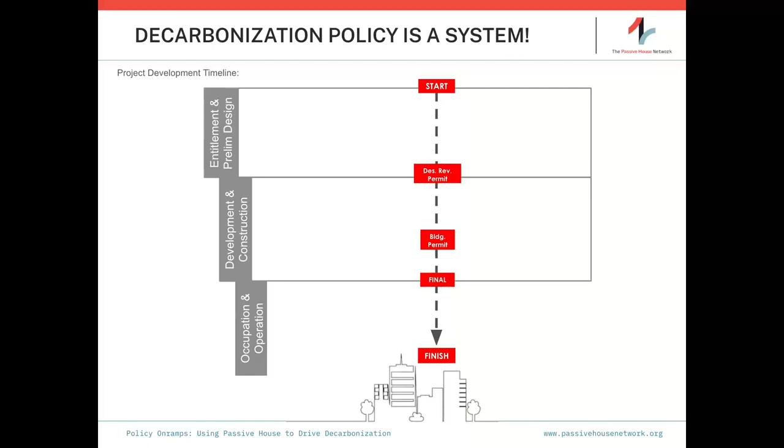If we look at the various overlays that affect those processes, zoning and design regulations are the first overlays we have to navigate, the hurdles. Then we've got the building codes and the energy codes that impact the development process.

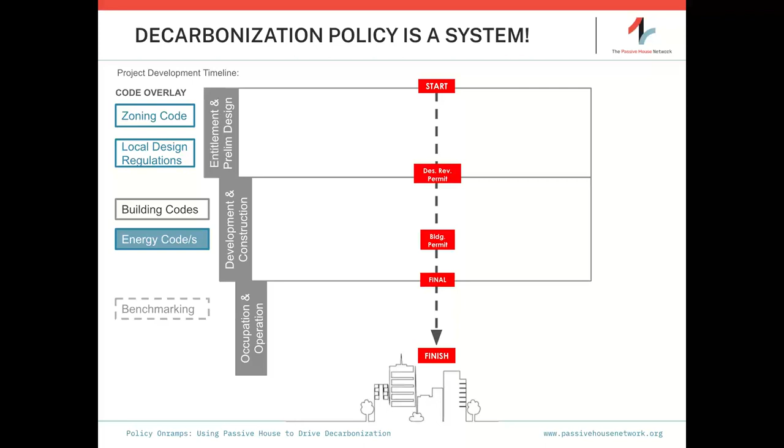I put benchmarking at the end here, because this is a policy and regulatory framework that's really just being implemented, and is being done so very successfully by various jurisdictions to drive decarbonization. It's a sort of retroactive policy that actually drives things at the front. Keep that in mind as we go through here, and don't forget that as an opportunity for a fabulous policy incentive program.

Our code compliant buildings all go through this, but primarily we look at policy, and we end up focusing, all of us efficiency folks including Passive House proponents like myself, primarily on this energy code as our key lever to push efficiency. What I'd like to share with you is that's actually only one lever, and I find it a very small and somewhat ineffective one.

I think we need to really expand our reach and look at other opportunities we've been missing, that are just sitting there like Cinderella waiting to be asked to the ball. Those are the two places where the conventional code framework looks at efficiency, and it's only in those two spots, you know, not all buildings actually do very rigorous site verification for whether the energy code requirements have actually been implemented on site.

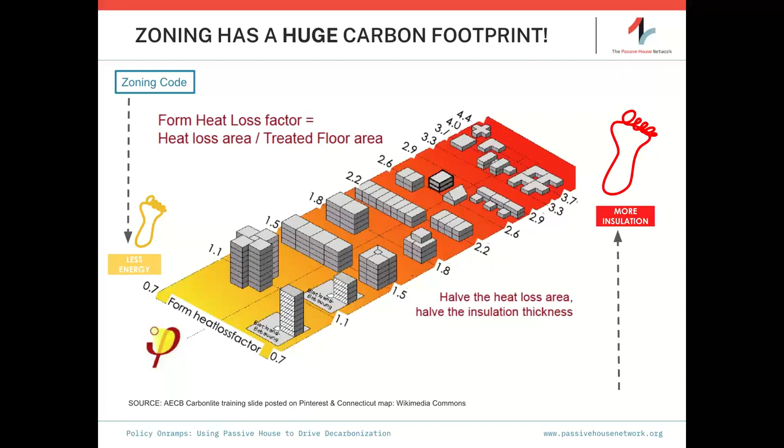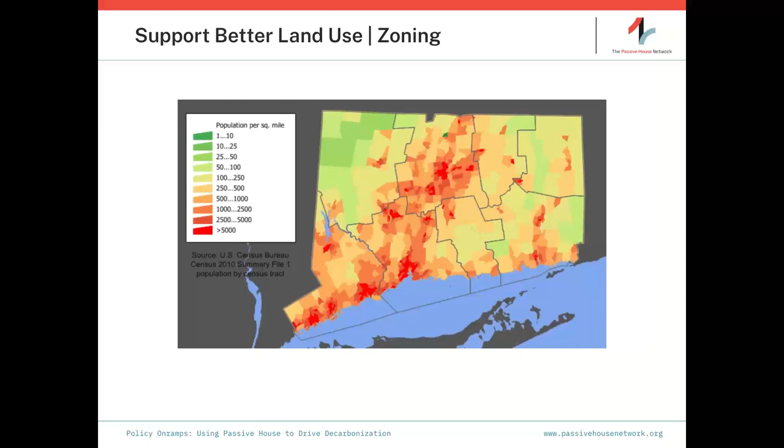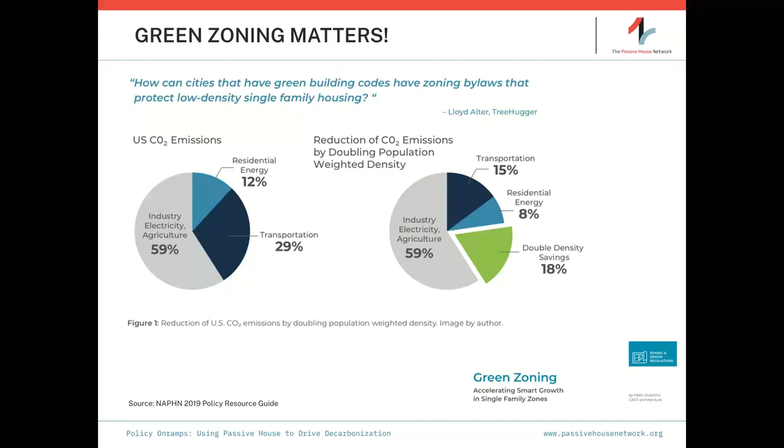As I mentioned, Matt Hutchins wrote a fabulous article for us in our policy resource guide that looked specifically at zoning and design regulatory overlays that disincentivize deep energy reductions, because 75% of most US cities are designated single-family zones, which is a very inefficient land use and planning structure. Matt talked about green zoning, accelerating smart growth even in single-family zones by allowing 4 to 6 unit buildings on those lots, showing the massive reduction in CO2 emissions that can result from simply removing the single-family zoning overlay.

And of course, the corollary to zoning are the design regulatory overlays. Many cities in California and elsewhere have design review guidelines for local neighborhoods that end up making architects, I'm sure all the architects on this webinar are familiar, break down the massing of their building. It's sort of another pet peeve of mine, where we come to these design review sessions, and the planners, in their well-intentioned way, think they're trying to make the building less visible, and what they force architects to do is add all these bump outs and break up massing, because it's perceived as a more benign, less impactful way to design. Effectively, what it's really doing is forcing architects to make their buildings way less efficient.

They're way harder to air seal, require more insulation, so a higher embodied carbon footprint, and actually structurally less safe. Out west here, earthquakes are a driver for our building design, but you have these load discontinuities by setbacks on second and third floors, and it really messes up the architect's opportunity to deliver a fantastically efficient design. So I'm always pleased when I see local design regulations like this one from Boston, where simple facades with more surface-mounted decorative elements are encouraged, rather than a monster amount of bump outs, gables and dormers, and all those architectural add-ons, what I call carbuncles. So keep it simple. Excess insulation is another carbon footprint impact.

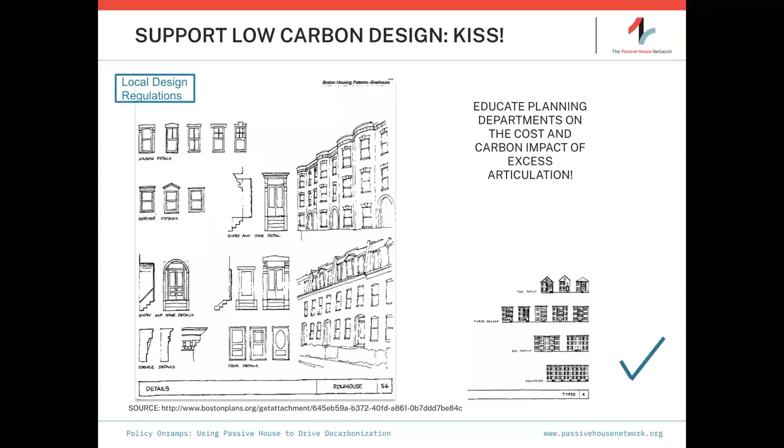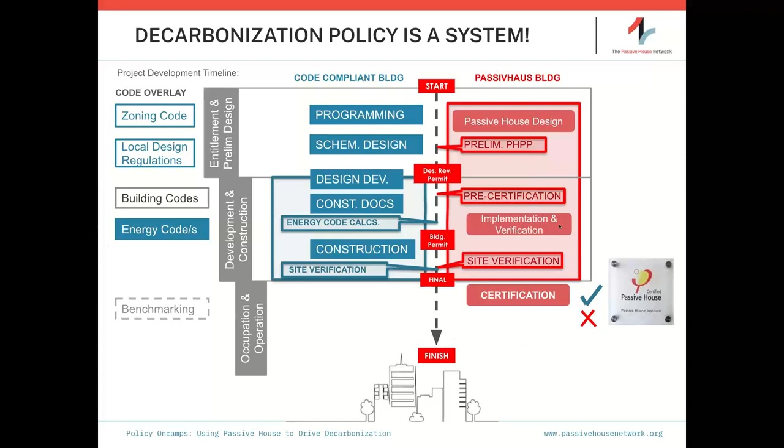And Passive House really incentivizes simple envelopes for that exact reason. So if we go back and do a quick recap, what I'm really encouraging us to do is start to look at our policies as this fully integrated system, not just in the vertical development timeline, but also in the horizontal ones. And the prime one, as I mentioned earlier, that we end up relying on for our efficiency programs is the energy code.

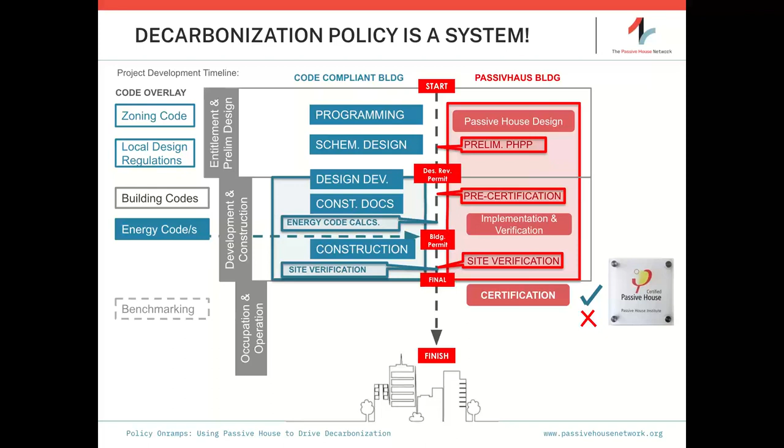And what I found in my advocacy work for Passive House, really digging into how the energy code is structured, I have found that even the energy code is not perfectly aligned and set up to incentivize and encourage Passive House. That sounds rather negative, and I don't mean to discourage support of energy codes. But what I've come to realize is that the structure of how the energy code is developed and evolved really doesn't fit very well with how Passive House is structured and would really be optimized.

So to explain, I'm going to use—I've primarily worked in policy advocacy out here in California, but for this, what I've seen is the ICC and ASHRAE process are very similar. So forgive some gross generalizations here, but essentially how those codes evolve and move forward is workshops are hosted in each of the areas of the building component. So in California, workshops are held for envelope measures to solicit proposals for how the building code can be adjusted, adapted, improved in each of these siloed elements of the building envelope.

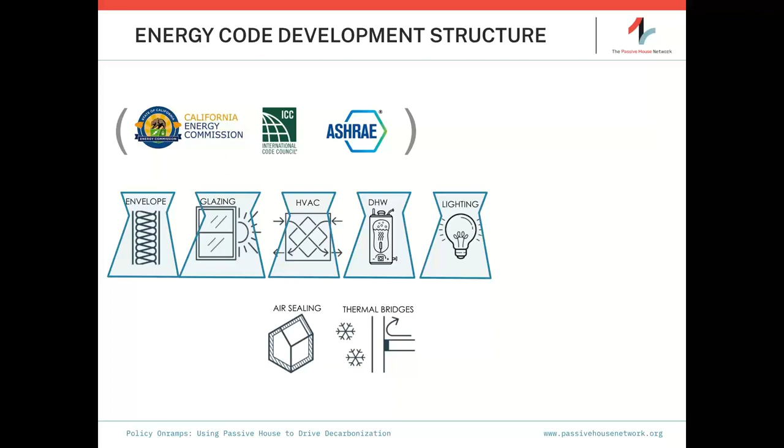And all of these codes are then reviewed and added together. They're layered over the previous code iteration, and issued in cyclical, incremental 3-year or 4-year cycles, then adopted at the local building jurisdiction level. And the point I'm also trying to make here is the goal of these codes is just a baseline cost-effective energy efficiency. It's a benchmark building framework, so a percentage better than a benchmark building. There's no absolute targets against your specific building. They coincide, they're cyclical, so in California it's a 3-year cycle update. But the real kicker is there's no finite end goal.

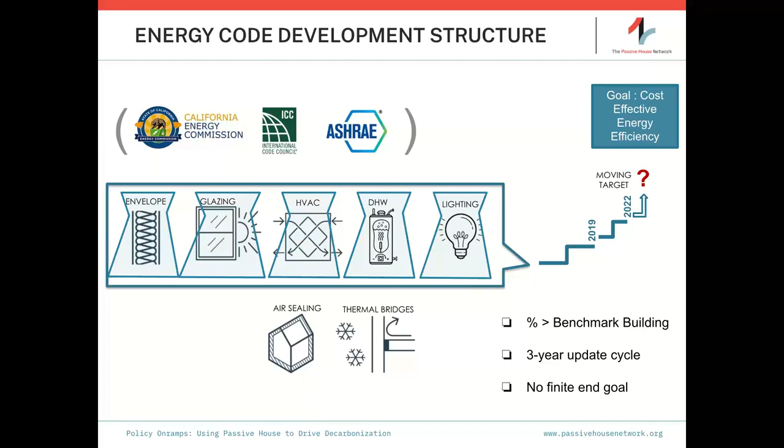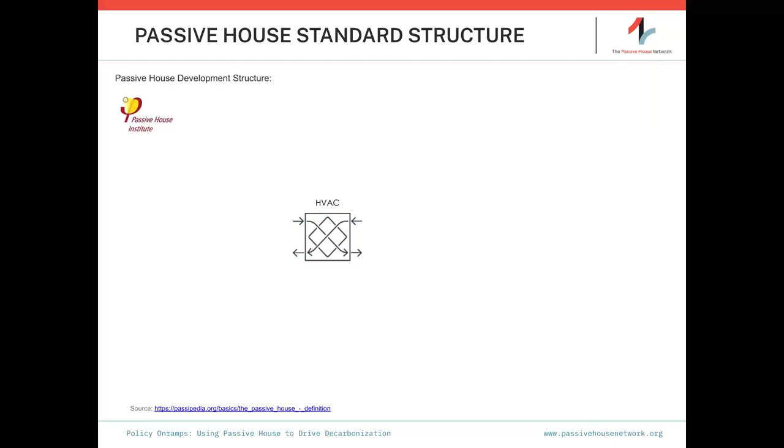And this is all in contrast to how Passive House is developed and evolved. If we look at Passive House, the primary goal, which I find really instructive in the age of COVID and this pandemic, the age of now real awareness about airborne viruses and diseases—really, the original definition and goal of Passive House was for hygiene ventilation.

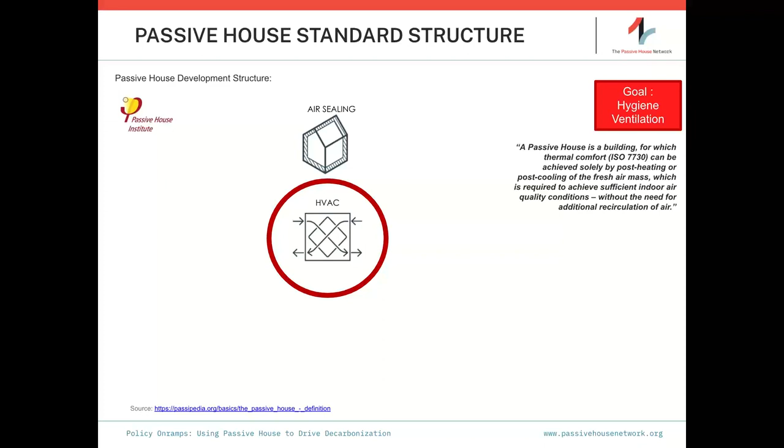I'm not going to read the definition there, it's available through a search on the Passipedia website. But essentially, Passive House was built with the goal of being able to deliver 100% fresh outdoor air while still remaining comfortable for the occupants of the building. Every other component in our built environment is designed, modeled, and built in service of that outcome. So, very different primary goal, very different way of structuring and determining how each component of your building needs to be designed and built.

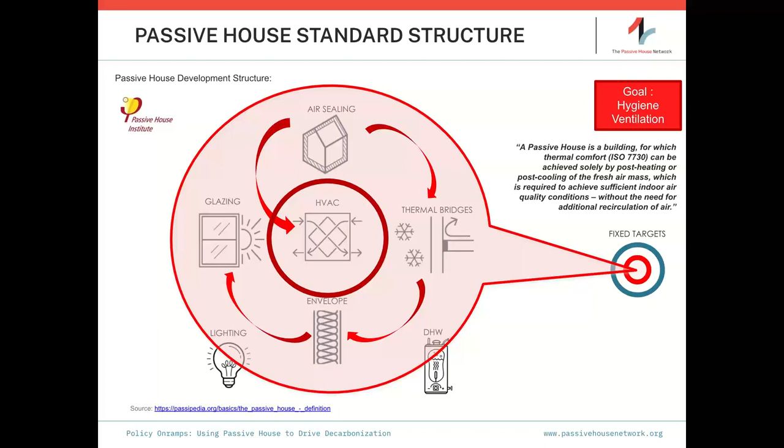And of course, the big differentiator with Passive House is it does have fixed targets. This is the essence of what actually I see as making Passive House become so successful.

And then the other differentiators, of course, are that Passive House design and the model are specific to each building. There's no benchmark building comparative component. It's revised periodically. The new issue of PHPP 10 just came out, but it's not yet available in English. I'm excited to see that. It will be issued shortly for the English-speaking world, and we will very likely be adapting it for our IP unit users here in North America and the US.

And then, of course, as I've mentioned, Passive House does have these very clearly defined targets and goals, which as an architect I personally find extremely helpful, because it's like a map. When you put into Google Maps where you want to go, if you don't have an end goal in mind, you have zero way of finding out how to get there. Which is my primary frustration with the energy code, and something I constantly tell our policymakers and code officials. If you can just finally give us an end goal, you might have a hope of us actually getting there.

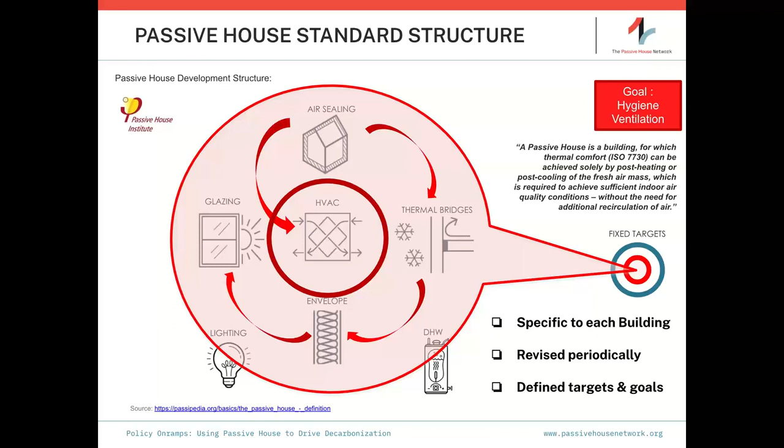So the point I'm belaboring here is what I've seen repeatedly: I have code officials coming to me saying, Bronwyn, how can we integrate Passive House principles into our energy code? For many years I really, very honestly and sincerely, tried to see how we could make that happen. We started off by trying to say, okay, we'll just require a blower door test so we can start by setting benchmarks for people in the field to know how efficient their buildings actually are. And that just never went anywhere.

I'm pleased to hear that on the East Coast, your code frameworks mostly do require blower door testing on site. But as I say, I'm still frustrated that California, for all our advancement, doesn't have some of the basics in place. And really what I came to realize over the years is that integrating Passive House into the standard code framework is actually a really bad idea. It doesn't enhance either framework, and it doesn't move the industry forward in a way that optimizes either process.

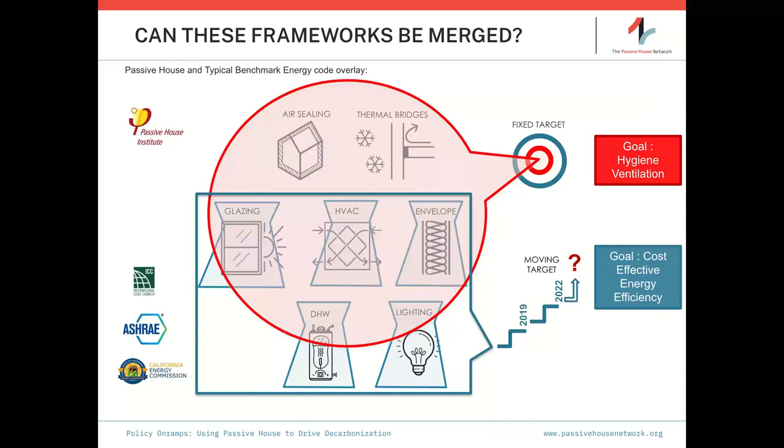The baseline code, it says in its title, is for the bottom end of the market. It's to stop the worst builder from doing stupid things. Whereas Passive House is targeted exactly at the high end of the market, the overachievers, the people wanting to do way better than baseline code. And that's the secret sauce of Passive House. That is the mechanism that has allowed all of these jurisdictions incentivizing Passive House to drag the bottom end of the market up from the top, rather than push them from the bottom.

So with that lecture there, I want to show you how these different policies have really been able to capture and harness the power of Passive House and implement them in various jurisdictions here in the US. Rather than do these additive processes, which we're all quite familiar with, transitioning by using all these separate components added together—and by the way, that's a heat pump water heater, that's an HRV, or heat recovery ventilator, and that's an air handler, so another heat pump.

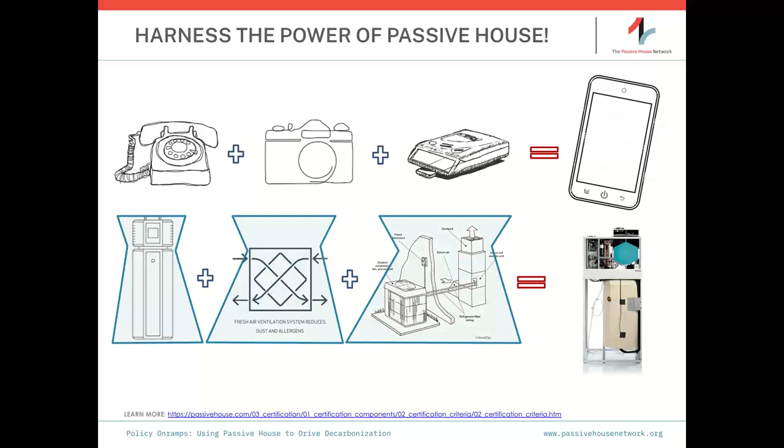What Passive House does is this: it allows the industry, not just in building design but in manufacturing, to actually figure out ways to really optimize systems. Rather than thinking of these things in silos, it allows us to leapfrog over that way of thinking and integrate systems. Rather than having two different heat pumps on your project, you can just have one, and it does all the things that we need in our buildings.

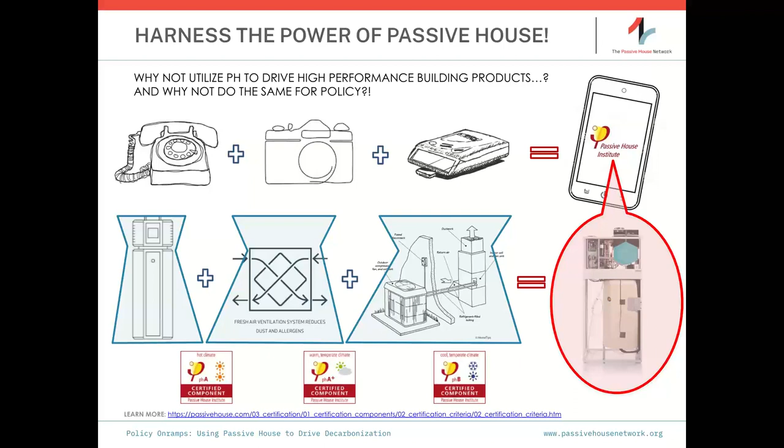And this, by the way, is a component that is still not available on the US market. It has been for decades in Europe, and I was rather jealous seeing, during my visit to China for the International Passive House Conference, that the Chinese now have these with even more bells and whistles available for their market. I'm really hoping that as Passive House scales in North America, our manufacturers will finally step up and deliver these integrated components. So Passive House can drive not only better building performance, but better product performance and integrated systems.

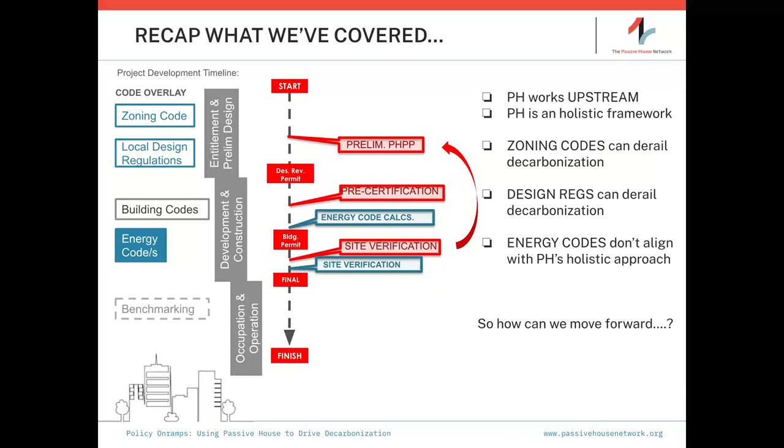So with that review, what policies can we use and what have been used to move this advocacy and incentives forward? At the Passive House Network, we did a very deep dive looking at codes and policies across the world that have been successful, because we don't have time to reinvent the wheel and reinvent new policies and frameworks. All we really need to do is replicate the ones that have worked very well.

And the originator of most of the policies I'm seeing being extremely successful here in the US, including this Connecticut one we are promoting today, actually originated in Brussels. The Brussels story is a fantastic one.

The Ministry of Environment looked at the existing building stock in Brussels. They were directed by the European Union to really overhaul and decarbonize their buildings. They said, okay, well, we are the worst offenders in the entire EU. How do we transform our buildings rapidly to be the best in class?

They implemented a fantastic program that incentivized the top performers. They didn't put any specific requirements, but it ended up being Passive House buildings, and they required them to be measured. The story they tell is that the Passive House buildings kept rising to the top. They were most successful, they became the most cost effective. Within a 7-year period, they transformed their built environment from some of the worst offenders to some of the best ones.

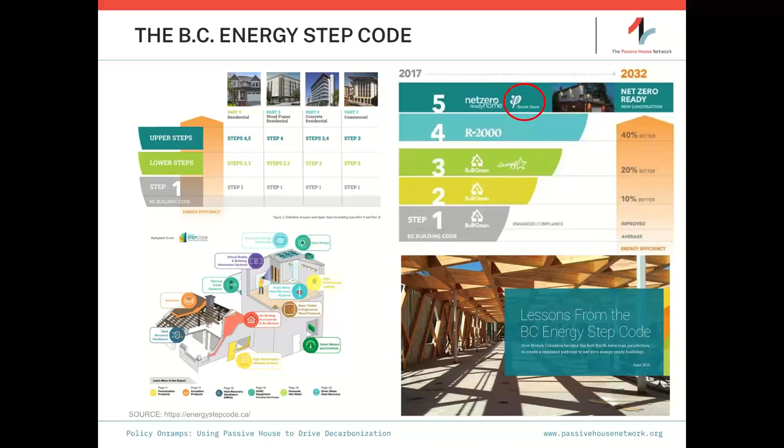So who else is doing exactly the same thing? I've mentioned in between that this exact same policy pattern has been implemented not only by Vancouver, but by the city and state of New York and the state of Massachusetts. These exact same policies - integrated training subsidies, building incentives, publicity programs - all of these are exactly what's driving passive house growth and accelerating it across that Northeast corridor.

And now Vancouver's fabulous success is being scaled across the Canadian landscape, and Toronto. I don't know if most of you may have heard of a small city, Hamilton, Ontario, doing phenomenal passive house projects. And these are all being supported by policy and really implemented because there has been training provided in those regions.

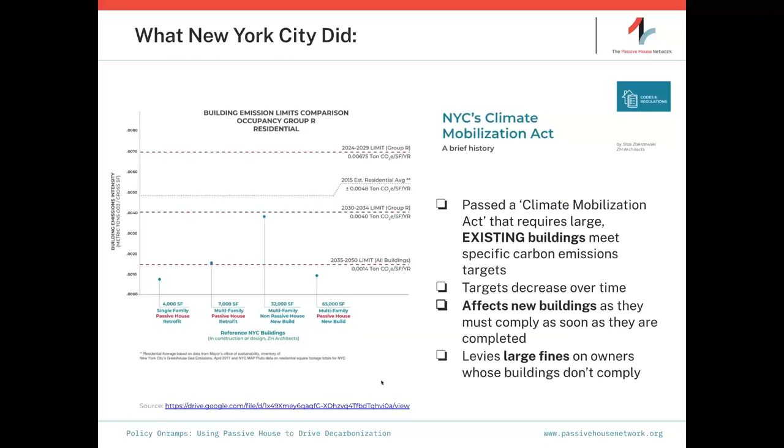He showed his developer clients that the Passive House projects, these three, all either complied readily or were right at the threshold of the 2050 target regulation. Whereas the non-compliant building currently being built would require a retrofit by 2030 to 2034. So any developer planning on retaining ownership of his property would, in a very short space of time, have to invest additional dollars in retrofitting his project, which really did not seem like a very good idea.

A few other programs and policies are included in this guide. The California one, something I was heavily involved in, was this REACH code we developed for low-rise multifamily buildings. I'm rather sad to say this has never been adopted by any city here in California. It's sort of sat there, it's my Cinderella REACH code, still waiting for a city to invite her to the ball. But essentially what we did was develop a REACH code for low-rise multifamily buildings so that cities could use it as a mechanism to drive passive house adoption.

It showed very clearly where passive house falls against California's Title 24 Energy Code. It was rather astounding to see that passive house in California, even though it's very simple, I'm still astounded at how easy it is to do passive house, and kind of embarrassed, to be honest. Yet when we compared passive house to our Title 24 energy code, perceived as rather rigorous, it still showed we have a very long way to go before we even get to passive house levels of efficiency.

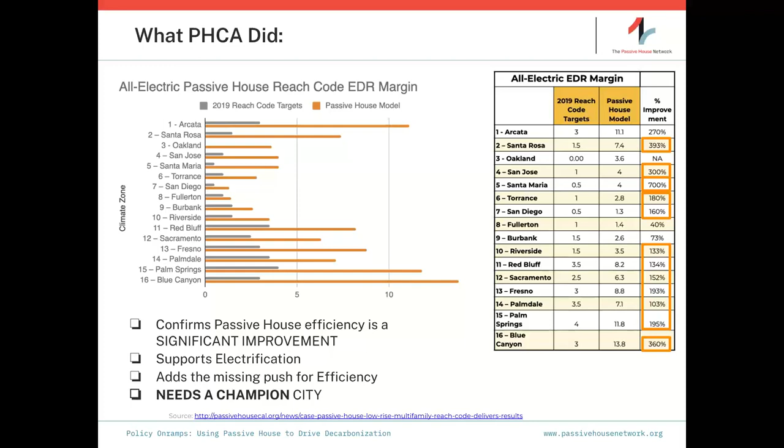In terms of electrification, what I'm highlighting very selectively here is we compared a mixed-fuel building to an all-electric building in passive house. Quite frankly, the only one I am promoting are the all-electric options. These are very deeply embedded in the PER, the Primary Energy Renewable Framework, that is promoted and used through the International Passive House certification framework. Really, we should not be building any passive houses with fossil fuel source energy.

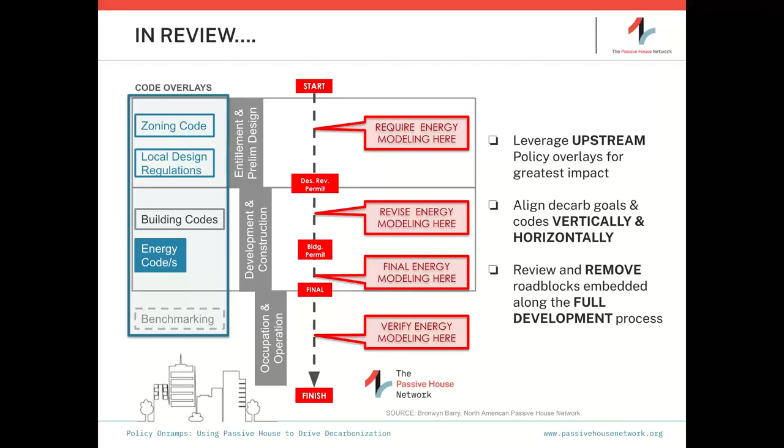So that really is the end of my program. I thank you so much for your kind attention, and I'm really pleased that Passive House Connecticut is on board and working with us. The Passive House Network was built to help support regional efforts, which hasn't always been easy, but we're here for you, and we really encourage and applaud all your local efforts. The team at ICF and Energize Connecticut, thank you for hosting this event. I want to finish by reiterating this incentive program - it has a lovely legacy starting through Brussels, Vancouver, New York, Massachusetts, of working. I'm delighted that you guys have implemented this program because this is a successful strategy, and I can't wait to see fabulous new projects coming out of Connecticut.

So with that, I am going to open up the floor for questions if anybody is still there and has any comments or would like to ask questions. I'd love to hear from you. It's always great to get some feedback.